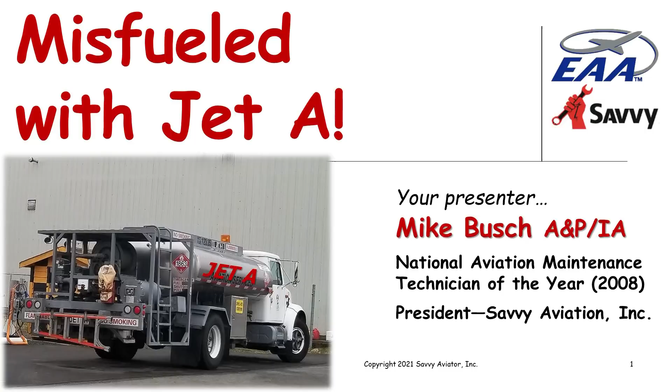But let me start off by talking about a couple of other misfueling situations that had somewhat worse outcomes than the one that happened to me, since I'm obviously here to talk about it.

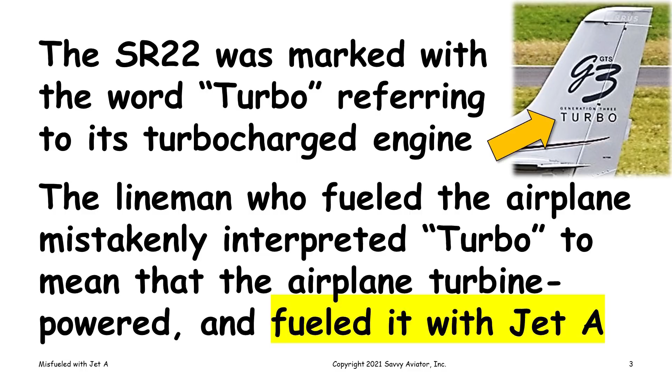In 2008, there was a fairly well publicized accident. It involved a Cirrus SR-22 turbo in Rio de Janeiro, Brazil. The airplane took off from Rio de Janeiro and wound up crashing, killing all 4 people aboard. The SR-22 was marked prominently with the words 'turbo' on the tail, indicating it was a turbocharged Cirrus. The lineman who fueled the airplane mistakenly interpreted the word turbo to mean that the airplane was turbine powered, which it obviously wasn't, and fueled it with Jet A. The pilot was not aware of that and took off with very tragic consequences.

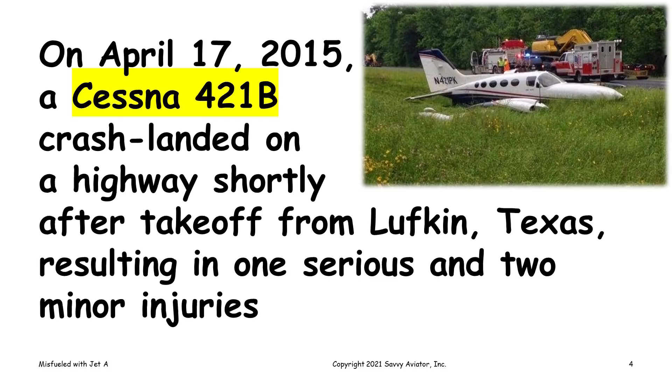About 7 years later, there was another accident. It wasn't fatal, fortunately, but this was in 2015. A Cessna 421B, twin Cessna, which is kind of the big brother of the Cessna 310 that I fly, wound up taking off from Lufkin, Texas, and crash landing on a highway shortly thereafter. You can see a picture of it here. It resulted in 1 serious and 2 minor injuries. The airplane landed kind of hard, but the pilot survived.

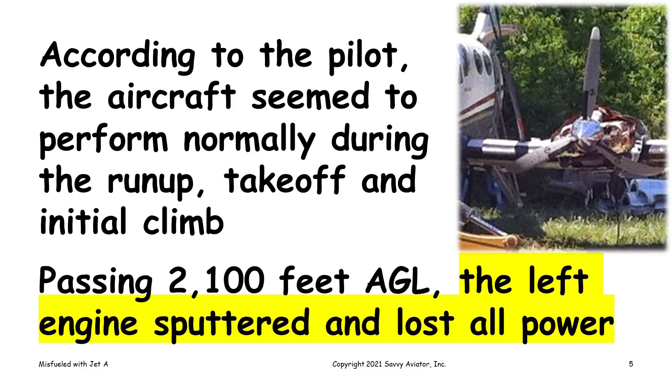According to his testimony, when interviewed by the NTSB, he said the aircraft seemed to perform normally during the run-up, takeoff, and initial climb, but passing 2,100 feet above ground level, the left engine sputtered and lost all power. Then within 30 seconds, the right engine also lost all power. So the twin had lost both engines. I can tell you from experience, these airplanes don't have a real good glide ratio when they've lost both engines. But at any rate, he wound up making a forced landing, it landed hard, damaged the wings and fuselage, and ruptured the right fuel tank, but fortunately there wasn't a post-crash fire. It came to rest on the grassy median of the highway.

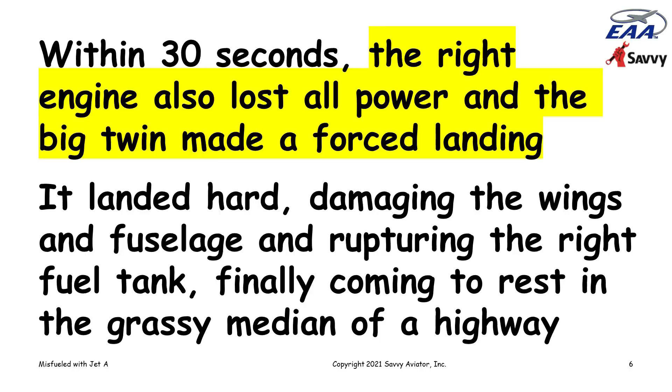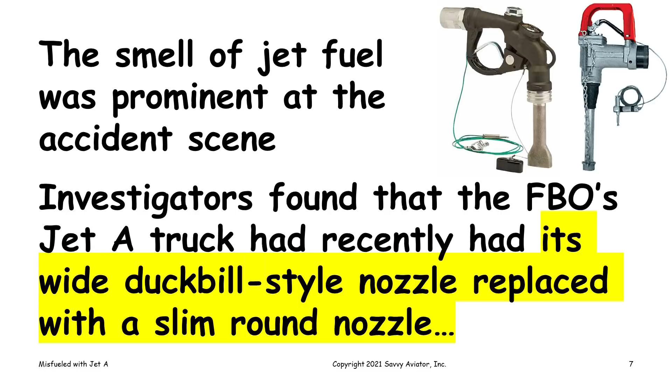You could see that in the picture. When FAA people got on the scene, they said the smell of jet fuel was prominent at the accident scene, and investigators found that the FBO's Jet A truck recently had its wide duckbill style nozzle replaced with a slim round nozzle, which it's not supposed to have. Except I subsequently learned that even though all turbine-powered airplanes are set up to accept the wide nozzle, there are some turbine-powered helicopters that the wide nozzle won't fit in. So it may be that's why the FBO put this skinny nozzle on their truck, but at any rate, it wound up defeating the whole purpose of the wide bill nozzle. In addition, that 421B did not have the fueling port restrictor rings that were mandated for these airplanes, including mine, in 1987 by airworthiness directive.

There'd been a bunch of incidents with turbocharged twin Cessnas because Cessna marked 'turbo' all over these turbocharged airplanes, so line people made the same mistake that they made with the Cirruses. In 1987, an airworthiness directive came out requiring that restrictor ports be installed in all fuel filler ports. I remember I bought my airplane in 1987 and it didn't have the ports, and I wound up having to comply with the AD.

So I remember installing those restrictor ports in the airplane to prevent the wide nozzle from being able to be inserted in the tank. But this 421B did not have the restrictor rings, even though it was mandated by the AD, and the truck had the wrong size nozzle. So even if it had the restrictor rings, that skinny nozzle would have fit in. There were all sorts of issues leading up to this 421B accident, which fortunately hurt the passengers but didn't kill anybody.

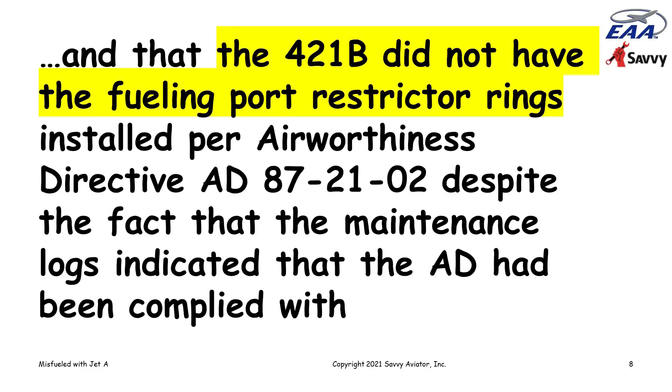But that brings me to talk a little about my own experience, which was quite eye-opening, and that happened almost 30 years ago in 1992. At the time I was doing software work for Visa International, whose headquarters is up in Foster City, just south of San Francisco. So I would commute up there for meetings in my Turbo 310, landing at San Carlos Airport, which is a small but very busy GA airport just south of SFO.

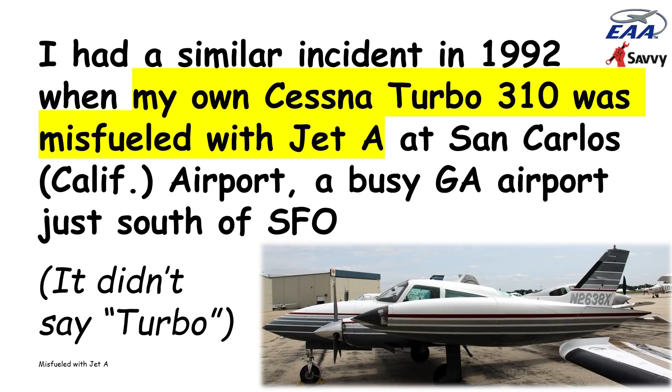My airplane got repainted and it didn't say turbo on it anymore, but nevertheless, I wound up having a tip tank that was fueled with Jet A instead of 100 low lead.

Fortunately, I caught the misfueler kind of in the act, red-handed, and had I not been lucky enough to do that, I probably wouldn't be around to present this webinar, because San Carlos has a rather short runway for a twin - it's a 2,600-foot runway. And right off the end of the runway is the world headquarters of Oracle, with 3 big giant towers. So if something goes wrong on takeoff, there's really no good place to put the airplane - probably wind up in the bay or something like that.

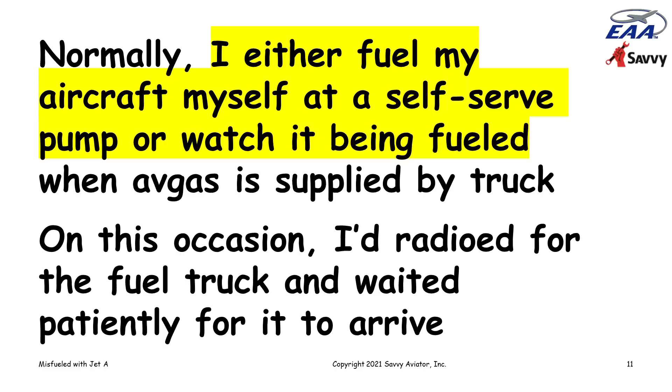Normally I either fuel the airplane myself at a self-serve pump, or I try to watch it being fueled if it's being fueled from a truck. On this particular occasion, I had radioed for the fuel truck and waited for it to arrive, and I waited and waited. After 10 minutes of waiting...

I had a call from Mother Nature that could not be postponed anymore, so I went inside the terminal building to find a bathroom. By the time I took care of my business and came back out to the ramp where my airplane was parked, the fuel truck was parked in front of my airplane, and there was a line person pumping fuel into the right main tank. On my airplane, the tip tanks are the main tanks.

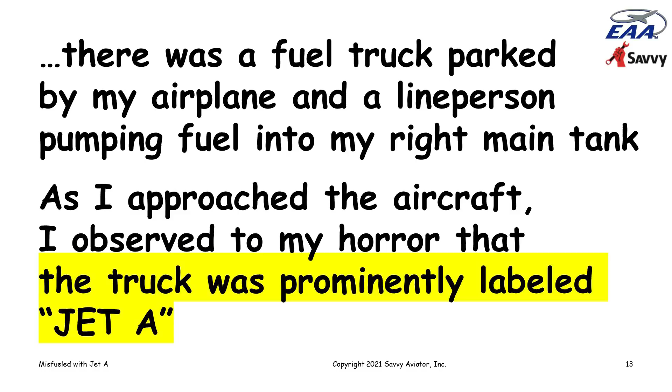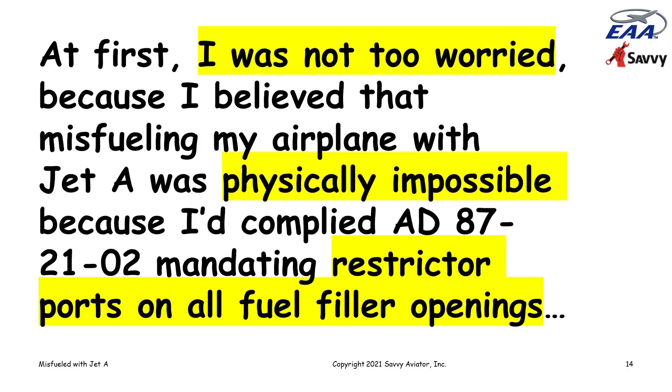As I approached the aircraft, I observed that the truck was labeled Jet A. Now, my first reaction when I saw this was that this probably wasn't going to be a problem, because I had installed the restrictor rings that were mandated by the AD, and so theoretically the fuel truck couldn't fuel my airplane with Jet A, because the duckbill nozzle would not fit into those restrictor ports. It's designed to prevent this sort of thing.

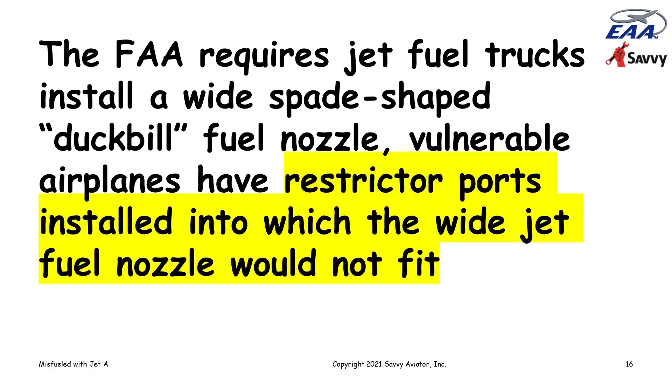And the FAA requires that jet fuel trucks have this spade-shaped duckbill nozzle, and that airplanes considered vulnerable, like mine, have restrictor ports installed so the wide jet fuel nozzle wouldn't fit in. So in theory, misfueling the airplanes is impossible, but of course it's theoretically impossible for bumblebees to fly. And as Robert Heinlein said, everything is theoretically impossible until it is done.

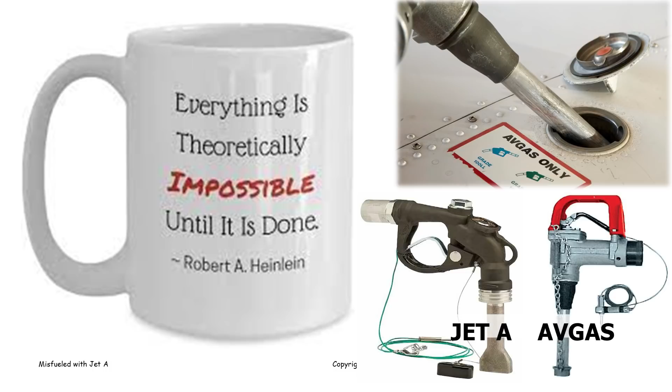Well, it was done. When I got to my airplane, I discovered that the line person had topped off my left main tank with Jet A, and then he discovered his error, put the nozzle back down on the ground, and radioed his office for help. Ultimately, the San Francisco FSDO investigated this and determined that their fuel truck had not been fitted with the duckbill nozzle. But at any rate, here I have an airplane with a tip tank that was topped off with Jet A, and it had been about half full.

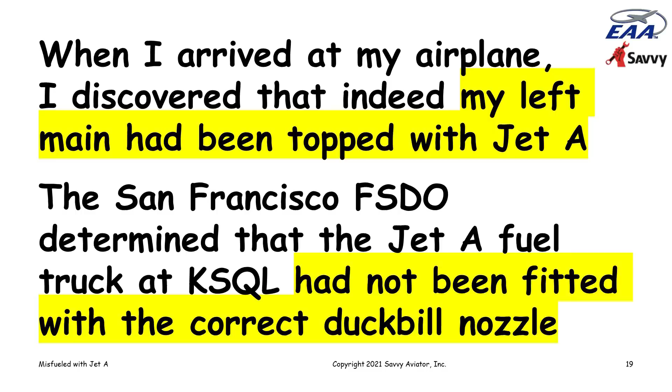So now I had like a 50-50 mix of Jet A and 100 low lead in this tank. Fortunately, I caught it - I didn't start the engine, didn't go flying or anything. So now what do I do? I was there for a business meeting at Visa, all dressed up in business clothes, a tie and a suit and all that stuff. And here I have an airplane half full of Jet A in one tank.

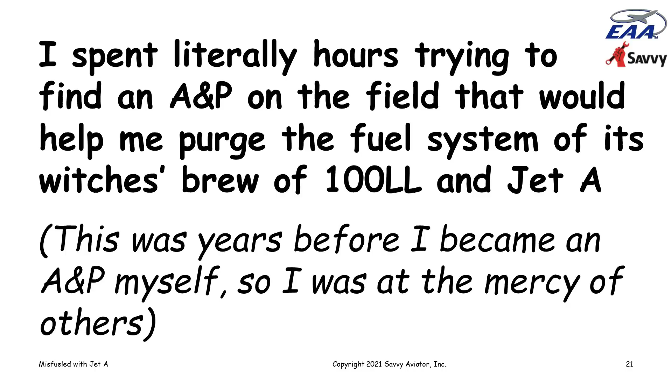And I started making phone calls, and I spent literally hours trying to find an A&P on the field that would help me purge my fuel system of its noxious combination of 100 low lead and Jet A. This was almost 30 years ago. I wasn't an A&P myself, so I was at the mercy of whatever A&Ps were there on the field. And the fueling company that did this deed, they were falling all over themselves to be helpful.

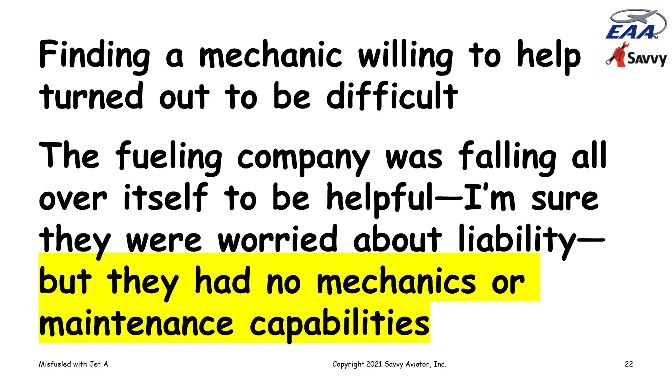I'm sure they were worried about being sued, but they didn't have any mechanics or maintenance capabilities. There were several shops on the field, but none of them wanted to touch the airplane, because all they could see was liability. So none of them wanted to help me purge the fuel system and get the airplane where I could fly it home.

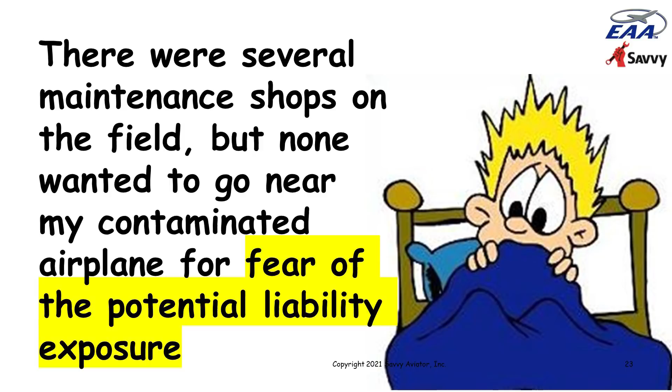After many phone calls and much pleading, I finally persuaded one director of maintenance at one of the shops on the field to help me out after I agreed to sign a waiver absolving his shop of any liability that would happen in connection with this operation. And so we went to work trying to purge the fuel system of this mixture.

So of course, first we drained the tanks as completely as we could, and put all the stuff we drained into a 55-gallon drum that the fueling company provided. This was going to be stuff that they would have to dispose of somehow. I'm sure it was not cheap to dispose of this stuff. But anyway, we drained the tank into this 55-gallon drum, but we knew that there was going to be jet fuel residue and jet fuel in the hoses and all of that stuff.

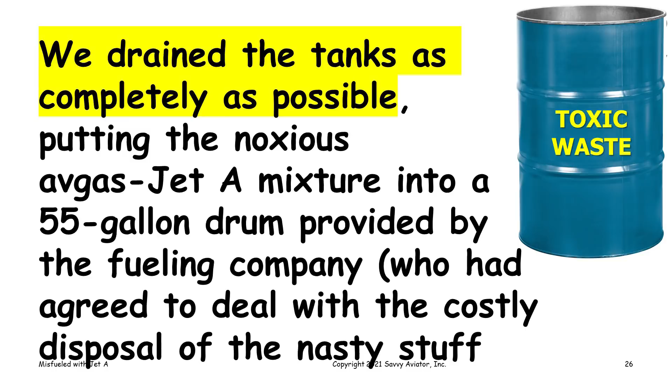So we disconnected the fuel line that was going to the engine-driven fuel pump. We drained all the fuel from that as well using the boost pump. And then we put 5 gallons of unadulterated 100 low lead in this empty tip tank, and used the boost pump to pump it through the system and into a bucket. And then we tested the bucket to see whether it was contaminated.

And to do that, we used what we call a paper towel test. If you pour some fuel on a paper towel and let it evaporate, if it's gasoline, it will evaporate completely and not leave anything on the paper towel. But if it's kerosene, if it's jet fuel, it'll leave an oily ring on the paper towel. So that was the test to see whether this fuel was contaminated or not.

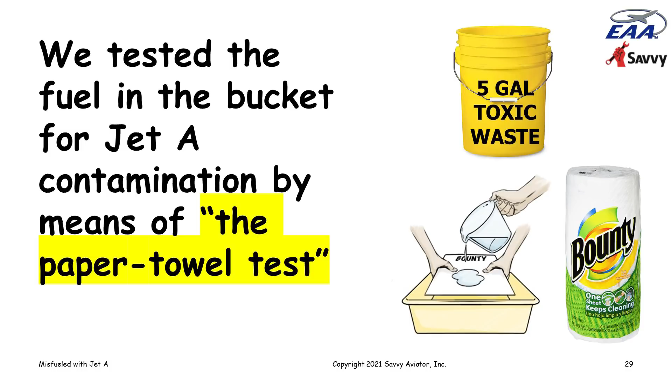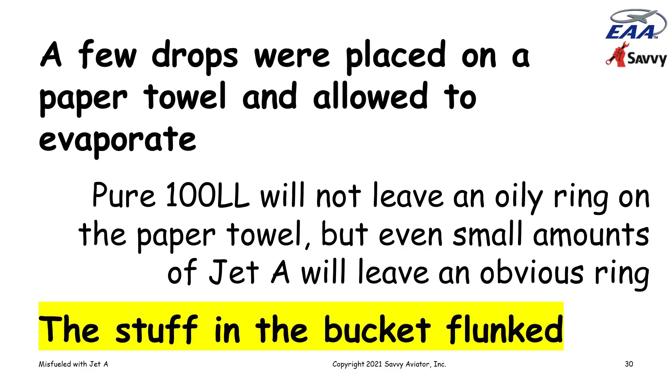So we put a few drops of the stuff in that bucket onto the paper towel, let it evaporate, and there was an oily ring on the paper towel. So clearly the system was still contaminated. So we put another 5 gallons of 100 low lead in and pumped it through the system into the bucket, and then tested it with a paper towel. And it flunked again, and we had to repeat the procedure 3 more times.

And in the meantime, all this 100 low lead was being supplied at no cost by this fueling company that was terrified of being sued. They were very cooperative, but they didn't have any mechanics. And eventually, after 5 flushes with 5 gallons each of 100 low lead, we finally got something that didn't leave a stain on the towel, and we were satisfied that the fuel system was purged.

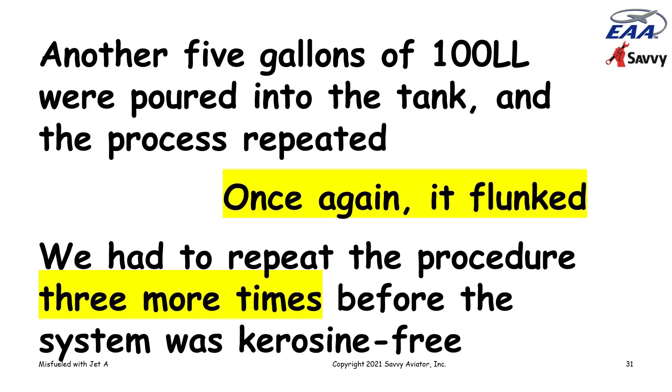So then we reconnected the fuel line, cowled everything up. The fuel company topped off the airplane at no charge. And this whole thing took about 6 hours after the misfueling incident. That included the time it took me to find somebody to help, and then all this purging process, and finally it was good to go.

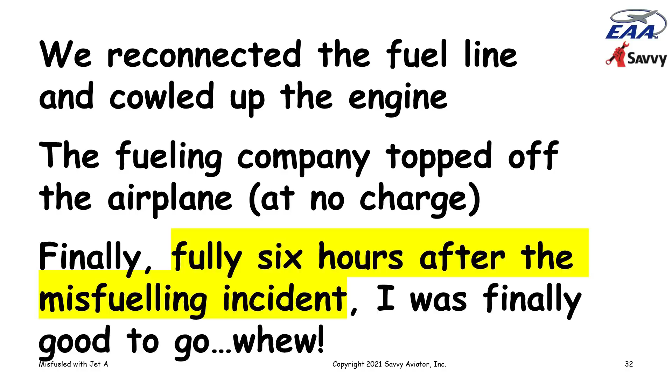So some lessons learned from this interesting episode that could have been an incident or an accident, or very likely a fatal accident had I not caught it.

One of the key things I discovered is that it's impossible to distinguish a pure avgas and a mixture of avgas and Jet A by color. I mean, as a private pilot, we were always taught, if it's avgas, it's going to be blue, or if it was the old 130 octane, it was going to be green. But nowadays it's all 100 low lead and it's colored blue. And if it's Jet A, it's going to be straw color.

But nobody ever taught me during private pilot training what the color of a 50-50 mix of avgas and jet fuel is. And if you think about it, that's really the issue that we're going to face in the field, because if an airplane is misfueled with jet fuel, it's almost never going to be a tank that's completely empty. It's going to have some amount of 100 low lead, and then the misfueling is going to add some jet fuel to it.

So what's the color of the mix of jet fuel and avgas? Well, it turns out that a mix of jet fuel and avgas looks exactly the same color as pure avgas. It's blue, and you literally cannot tell the difference just by looking at the color.

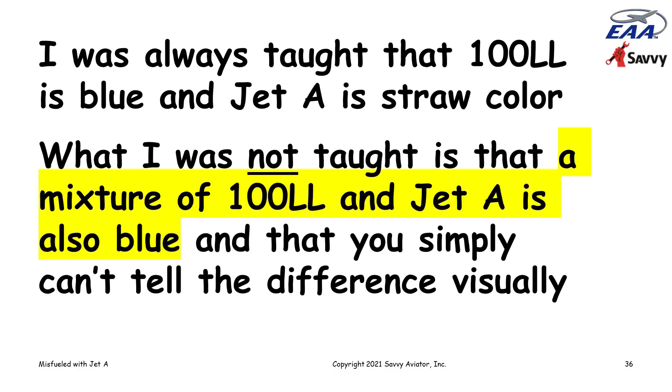The other thing that I was taught as a private pilot that turns out not to be exactly correct is that because jet fuel is significantly heavier than avgas, 6.7 pounds per gallon as opposed to 5.85 pounds per gallon, the jet fuel and 100 low lead will separate, and the jet fuel will wind up at the bottom, and the 100 low lead will wind up at the top. And then if you drain the tank through the quick drain, you're going to get something that isn't blue.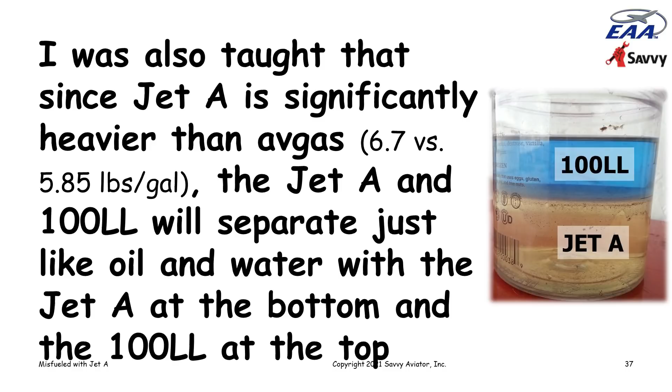Well, that's true only if this mixture sits in the tank for a very, very long period of time. It turns out that 100 low lead and Jet A mix very well, and then the mixture takes a surprisingly long period of time to separate. It's not like water in avgas, which immediately goes to the bottom of the tank. So unless the misfueling happens and then the airplane sits overnight or something, when you drain the tanks, you're going to get something that's blue.

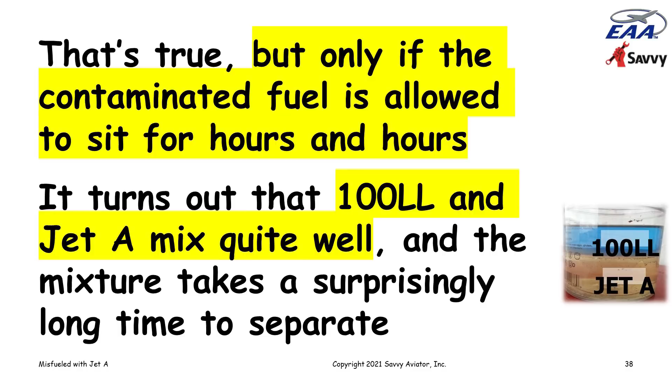So there are at least two good ways to distinguish pure 100 low lead from kerosene contaminated 100 low lead. One is to smell it. Jet A is a very distinctive odor, detectable even in small concentrations. And of course, I mentioned before when we were talking about the 421B accident, when investigators came on the scene, the place reeked of jet fuel smell. It's very distinctive.

An even better test is a paper towel test. When in doubt, if you pour a sample on a white paper towel, even a white piece of paper or something, and let it evaporate, it'll leave an oily ring if there's jet fuel in it, and it will evaporate completely if it's pure gasoline.

So let's talk about what happens if you don't catch this and the engine starts to run on a mixture of 100 low lead and Jet A, which is typically what we're dealing with. And this mixture is kind of nasty stuff. The best way I think to think about this problem, it's a little bit of an oversimplification, is to think of Jet A as being gasoline with a 0 octane rating.

Octane is a measure of detonation resistance. So think of Jet A as being fuel with 0 octane. If you ever tried to run a piston engine on pure Jet A, it would go into instant destructive detonation, and you would never get to apply takeoff power because the engine would be seriously messed up before you ever got to the end of the runway.

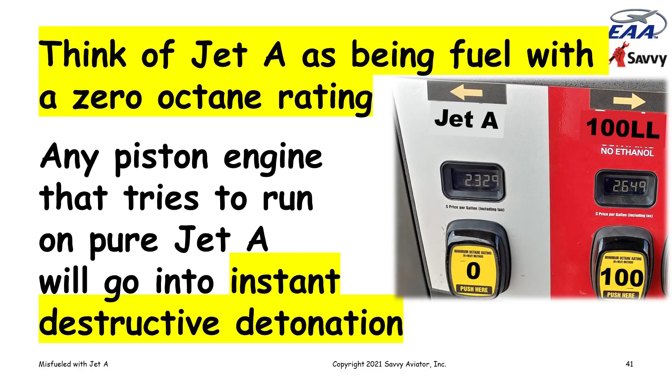But that's not what happens in the real world. You aren't running this engine on pure Jet A. You're running it on some mixture of Jet A and 100 low lead, and the percentage of the mixture can vary all over the place depending on how much Jet A was put in the tank and how much 100 low lead was there to begin with. So the real world problem is not running on pure Jet A, but running on a mixture. And depending on the ratio of Jet A to 100 low lead, the effective octane rating of the fuel can be anything between 0 and 100 octane.

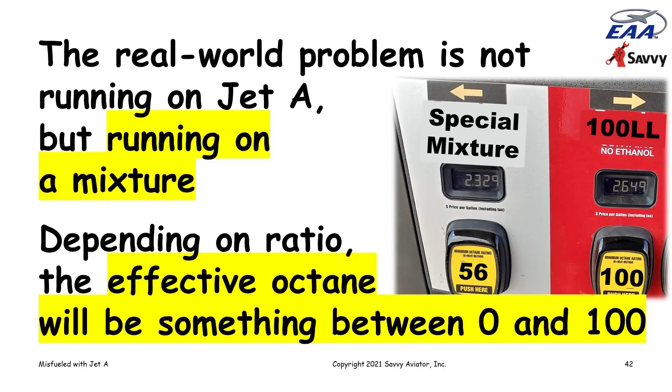The more Jet A is in there, the lower the effective octane rating will be, which is resistance to detonation. So a mixture with a lot of Jet A and just a little 100 low lead would probably be detectable during run up. The engine would go into detonation and the CHTs would go crazy and it would run real rough. But a 50-50 mix, which is basically what I had in that main tank, because it was approximately half full when I called the fuel truck over.

A 50-50 mix would probably go through run up perfectly normally and would not start to detonate until full power was applied. And the engine might fail 30 seconds after takeoff, or 3 minutes after takeoff.

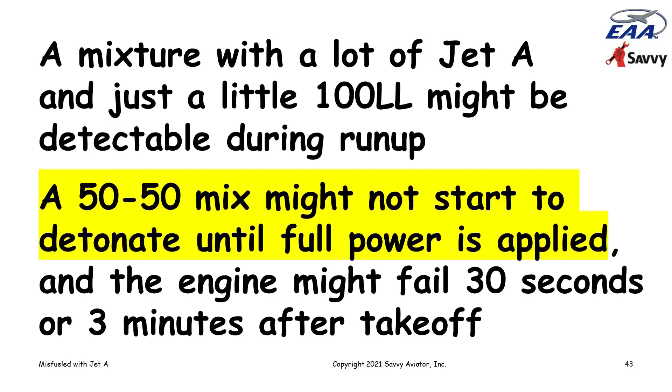Just a small amount of Jet A contamination might produce only moderate detonation that wouldn't really hurt anything, except maybe it would cause some spark plug insulators to crack, or maybe it wouldn't be noticeable at all. Light detonation just cleans off everything, like sandblasting the combustion chamber. Everything comes out really clean, and all of the deposits are gone.

But the heavier the detonation, the more likely you are to go into thermal runaway and start melting pistons and doing really bad things. So depending on the ratio, the symptoms might be undetectable, or they might be a minor thing like cracking spark plug insulators, or it might be a giant thing like melting pistons, and maybe the molten aluminum would get in a bad place and pretty much destroy the whole engine.

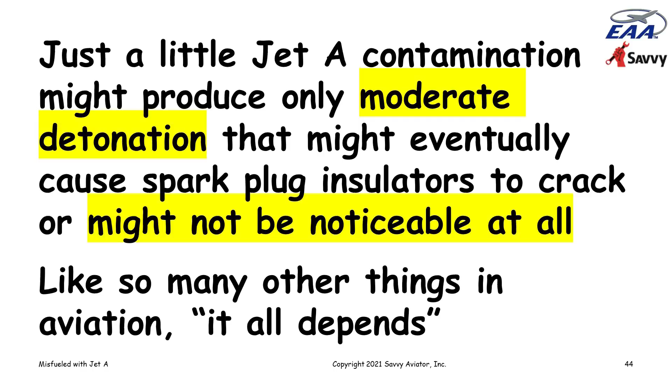Those two accidents I started off with talking about, the SR-22 and the 421B accident, remind us that this problem is still with us despite the FAA's efforts to eradicate it with restrictor ports and duckbill nozzles and all of that stuff. So as pilots, we need to be vigilant for this.

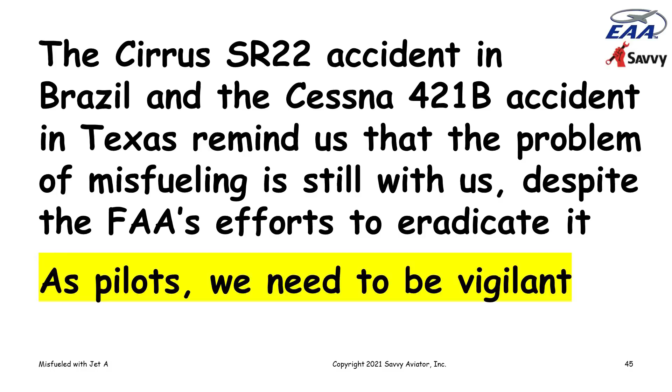Always watch your airplane being fueled if you possibly can, to make sure that it's being fueled with the right stuff. Make sure the filler ports are equipped with restrictor openings that a duckbill nozzle won't fit into. That's not a 100% guarantee against misfueling, but it certainly would help in a lot of cases, assuming that the fuel truck is properly equipped. And then when you drain the fuel, don't just look at it, sniff it.

If it smells a little funny, go to a restroom, get a paper towel, and pour some of it on the paper towel. See if it evaporates cleanly or if it leaves an oily ring, because this can be pretty darn serious.

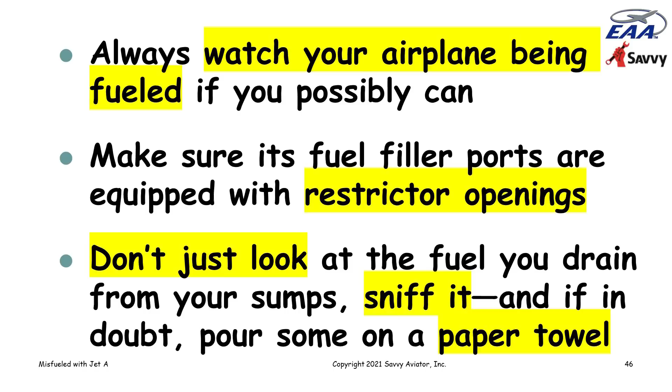All right, Mike. Did I catch you by surprise? No, I wasn't sleeping here yet. Okay.

John just wanted to say another kind of fueling mishap at his school. He said at least 2 fuel gauges have slipped through people's fingers into the fuel tank. Is this urgent or can they slosh around for a while? I don't know. Maybe he's talking like a dipstick. Maybe he's got a tank where they actually dip it and the stick fell in, it sounds like.

Well, most likely, if you dropped something large and solid into the fuel tank, it probably wouldn't hurt anything, assuming it's not fuel soluble. If it was fuel soluble, then it might wind up being some kind of sticky goo that could mess things up. But it probably wouldn't hurt anything, except it would reduce the capacity of the tank just slightly.

But typically the way fuel tanks are set up, where the fuel tank feeds into the fuel supply line, there's a fairly coarse screen that protects the system from ingesting any large particulate matter that might be in the fuel tank. And in most airplanes, there's at least 2 or 3 levels of fuel filtration before the fuel gets to the engine, because there's a fairly coarse screen at the tank port, and then there's a gascolator that has a finer screen, and then if it's a fuel injected engine, normally there's an even finer screen in the fuel control unit or the fuel servo, to prevent even very small particles from clogging injectors and so on.